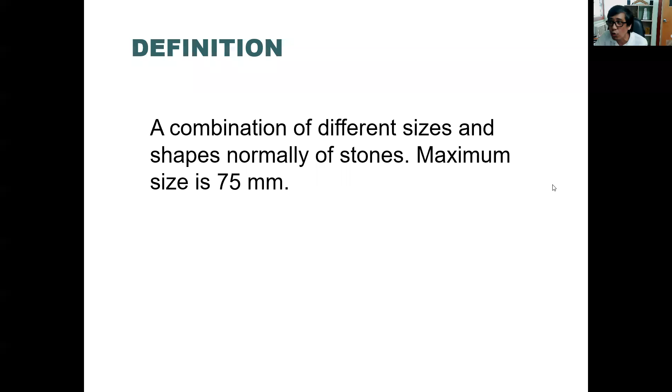Aggregates are a combination of different sizes and shapes, normally of stones, with a maximum size of 75 millimeters. The uses of aggregates include underlying material for foundation and pavement, used under the foundation or before pouring concrete to slabs on field or road.

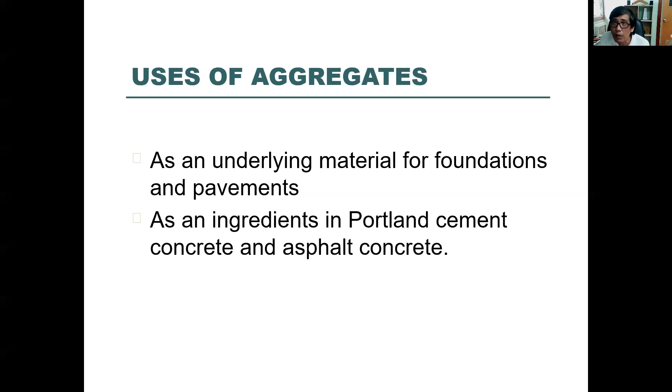Aggregates are also an ingredient in Portland cement, concrete, and asphalt concrete. If you will create concrete mixture, you need to get aggregates. And if you need to create asphalt concrete, you mix aggregates with chemicals and oils to create asphalt concrete pavements. The selection of aggregates shall be hard, durable, and clean, free from adherent coatings and organic matter, and shall not contain appreciable amounts of clay.

You need to wash the aggregates to make sure any organic matter is washed out. Also, the aggregate should not contain harmful impurities like salts, coal, mica, shale, or iron, as these will affect the hardening of the concrete or attack the reinforcement or reinforcing bars. So you need to take out all the impurities.

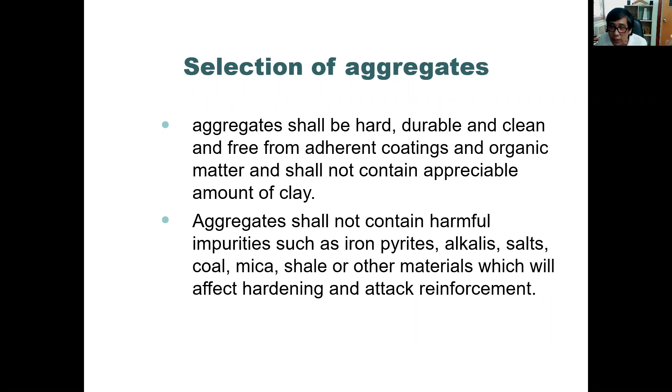As we all know from our previous lecture, the components of rocks, there are several rocks that have impurities on them. So you need to take out all of those impurities.

The classification of aggregates: we have two types, fine aggregates and coarse aggregates. Fine aggregates are aggregates which pass through a sieve of 4.75 millimeter, or an aggregate with a size less than 5 millimeter.

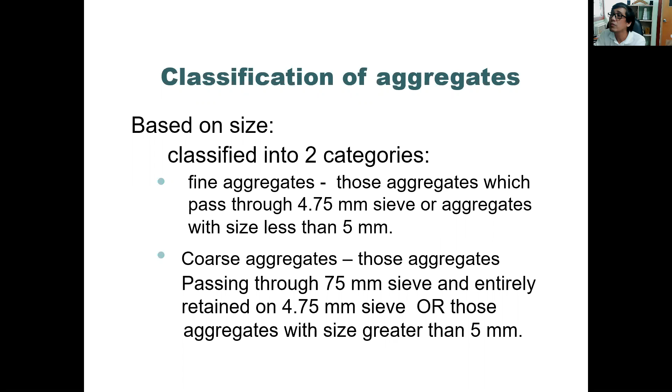The coarse aggregates are those aggregates passing through a sieve of 75 millimeter and entirely retained on a 4.75 millimeter sieve. So the size of the sieve hole for segregation of fine and coarse aggregates is about 4.75. Less than 4.75 is fine, and more than 4.75 up to 75 millimeter is coarse aggregates.

Based on the source or method of manufacture, we have two categories: natural aggregates and manufactured aggregates. The natural aggregates are uncrushed gravel or uncrushed aggregates, from river beds, river sands, or ex-mines.

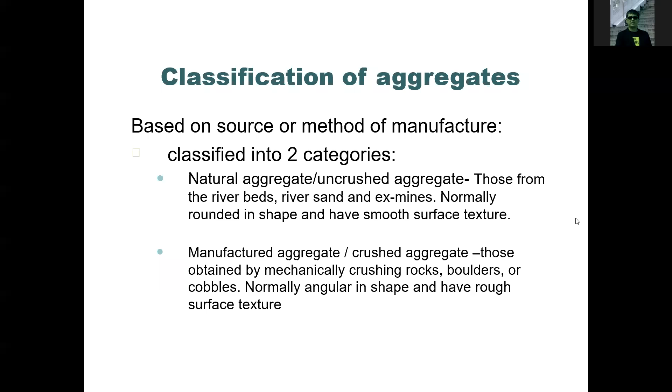Based on density, we have three types: lightweight, normal weight, and heavyweight. The normal weight aggregates are crushed stones, gravel, and ordinary sands, examples of normal weight aggregates. They are commonly used in manufacture of normal weight concrete, asphalt concrete, and roadway sub-base.

The average value of specific gravity for sand and gravel is about 2.6 to 2.65. Bulk density of normal weight aggregate is around 1,520 to 1,680 kilogram per cubic meter. So this is the normal weight aggregates.

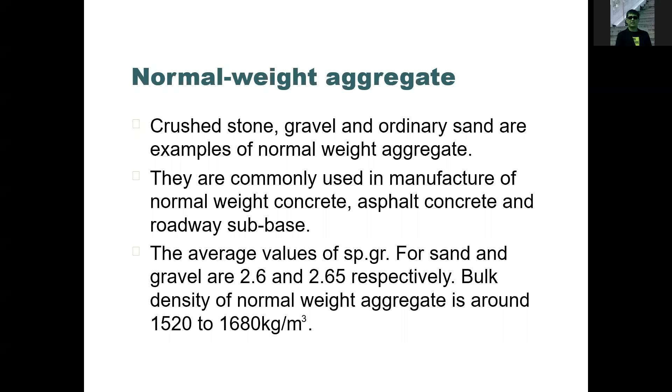Now if we look at lightweight aggregates, these are fine aggregates or any aggregates with a bulk density of 1,120 kilogram per cubic meter, so lighter than the normal weight aggregates. They are commonly used as ingredients in the manufacture of lightweight concrete, for making lightweight masonry blocks and lightweight floors and roof slabs.

There are two types of lightweight aggregates. One is the natural lightweight aggregates that come from palm oil shell, rice husk, and others. And the manufactured, also called synthetic lightweight aggregates.

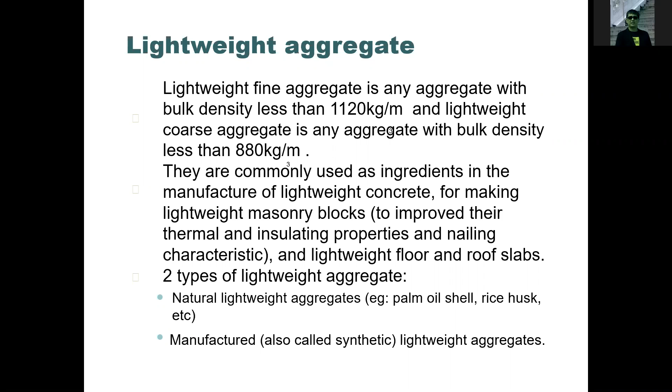The heavyweight aggregates are those aggregates with high density, used primarily in manufacture of heavyweight concrete employed for protection against nuclear radiation and in bomb shelters. The unit weight of the heavyweight aggregate varies from 2,400 kilogram per cubic meter, with a specific gravity range from 4.0 to 4.6, so this is heavier than the normal weight.

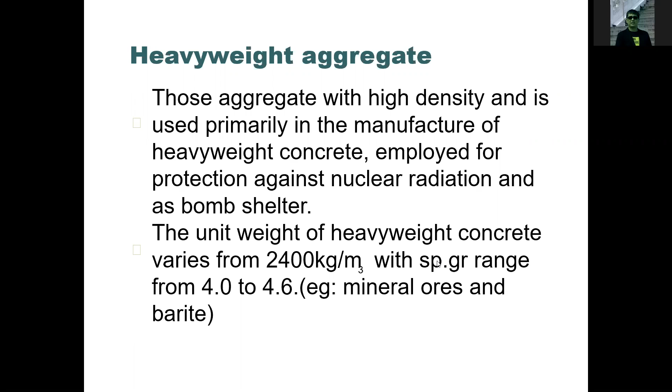The normal weight aggregates are about less than 2,400 kilogram per cubic meter, and the lightweight is about 1,600 kilogram per cubic meter. So now we know lightweight, normal weight, and heavyweight aggregates.

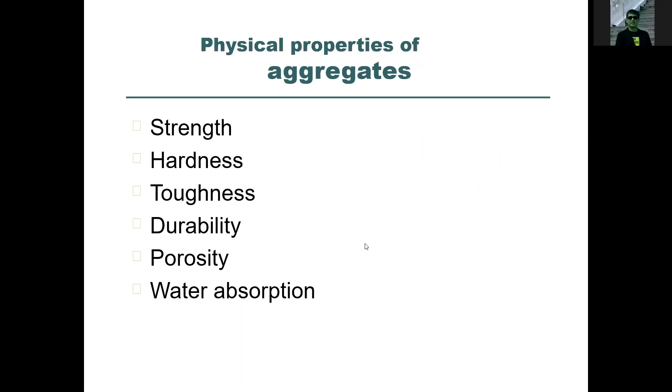The physical properties of aggregates include strength, hardness, toughness, durability, porosity, and water absorption. In terms of strength, in practice majority of normal aggregates are considerably stronger than concrete. If you compare the strength of stone to the strength of concrete, the stone is more durable or has more strength than the average concrete.

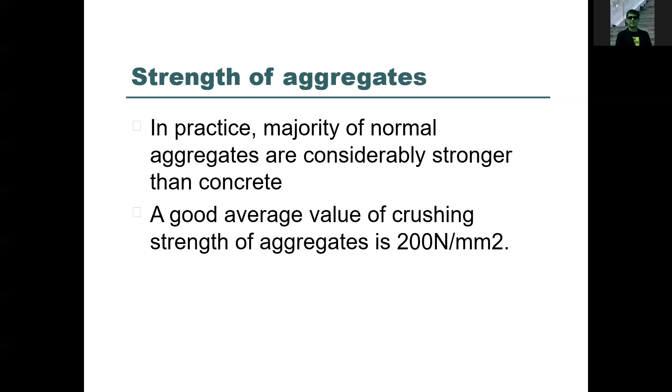Concrete is a mixture of stone, gravel, sand, and water. Stone is harvested from quarries, from rivers, or from mountains. A good average value of crushing strength of an aggregate is 200 Newton per millimeter square. Now, hardness of aggregates.

Aggregates have the ability to withstand wear, load, or applied pressure. In terms of applied pressure, this refers to the hardness of the stone.

If you apply pressure on the stone, the harder the stone, the more it will resist or withstand that pressure. The hardness depends on the type of parent rock. As discussed previously, metamorphic rock has different types of parent rocks, and if the parent rock is harder than other parent rocks, it will create a harder aggregate.

A satisfactory aggregate should have an abrasion value of not more than 30% for aggregate used for wearing surfaces, and 50% for aggregate used for non-wearing surfaces.

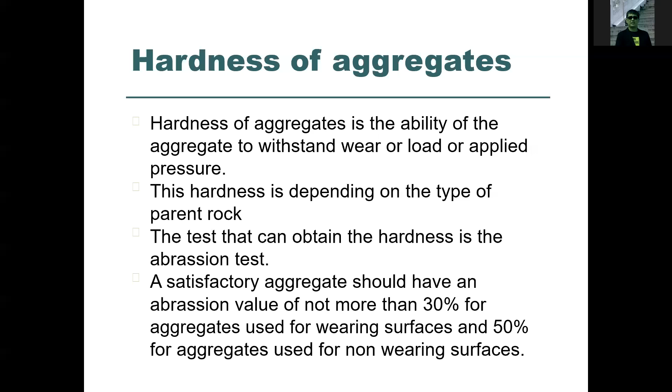Toughness is the resistance of the aggregate to failure by impact, which is very different from hardness. Toughness is determined by impact—if you take a hammer and hit the rock, and it doesn't break easily, that is the toughness of the rock. This can be determined by the aggregate impact test.

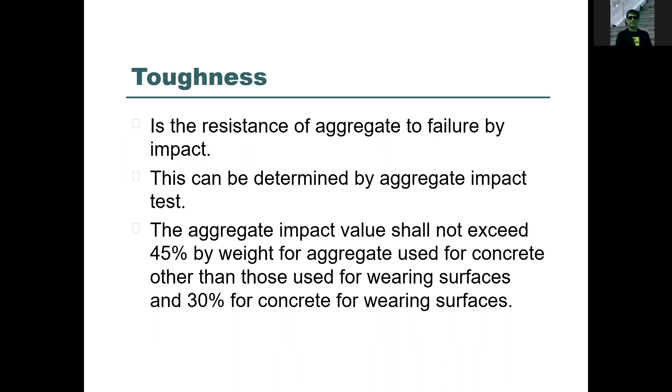The aggregate impact value shall not exceed 45% by weight for aggregate used for concrete other than wearing surfaces, and 30% for concrete used for wearing surfaces.

Durability of aggregates is the ability of the aggregate to withstand external or internal damaging attack. The external damaging attack is the resistance from external weather—heat from outside, outside moisture. That is the measurement of the durability of the rock or aggregate.

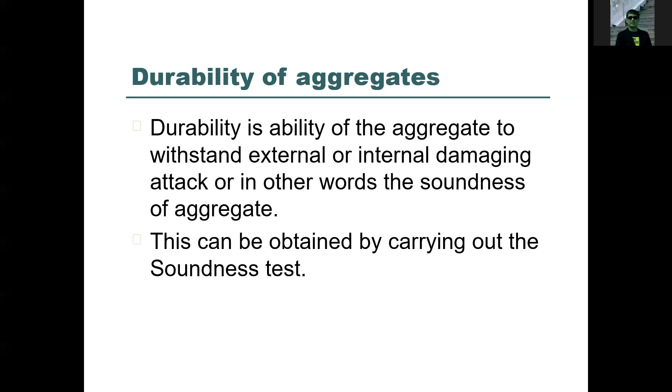This can be obtained by carrying out the soundness test. So you can measure durability by using the soundness test.

Porosity: aggregates normally have pores of various sizes. Aggregates will absorb water when dry, but normally release water in the concrete mix when wet. So the amount of water and its rate of permeation depends on the size and volume of the aggregate.

Since the aggregate comprises 75% of the concrete volume, it is essential to note that the porosity of the aggregate contributes to the overall porosity of the concrete. If the aggregate is porous, the concrete is also porous, so the porosity of the concrete mixture depends on the porosity of the aggregate.

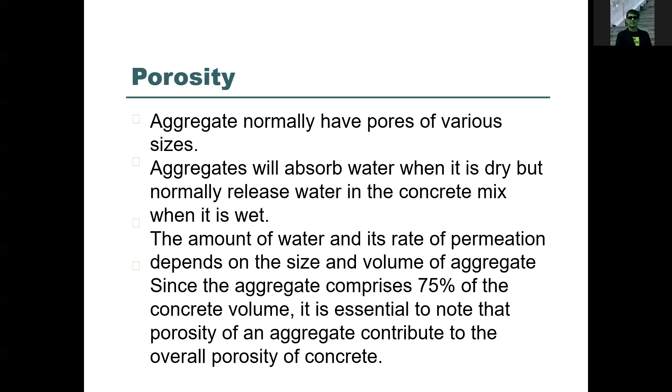In terms of texture and shapes, round shape aggregates are usually natural aggregates—if you get aggregates from the riverbed, they are naturally round. Irregular shape is a combination of different shapes. The angular shape is usually crushed stone—if you crush a large rock into specific sizes, that is called crushed stone, and it is angular in shape.

The flaky shape is where the thickness is less than the length. The elongated shape is where the length is larger than the width and thickness. Flaky and elongated is a combination of these two characteristics. In terms of surface texture, the aggregate may have a smooth texture, coarse or rough texture, or fissures or pores.

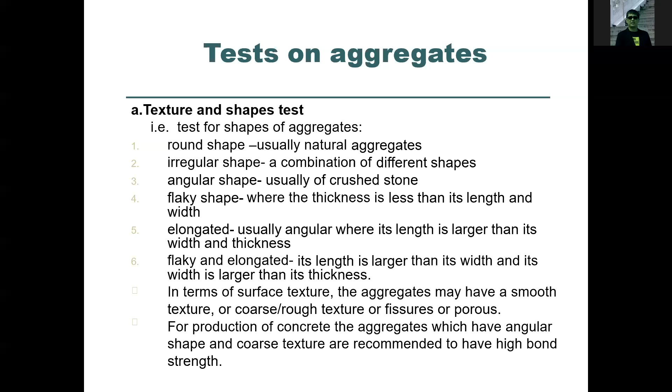For production of concrete, aggregate with an angular shape and coarse texture is recommended for high bond strength. So in creating concrete mixture, it is better to use crushed gravel because of its coarse or angular shape—it will bond easily with the cement and sand, and create a high bond strength.

In testing aggregates, we have different tests available: the aggregate crushing strength test, the Los Angeles abrasion test, the aggregate impact value test, and the 10% fines test.

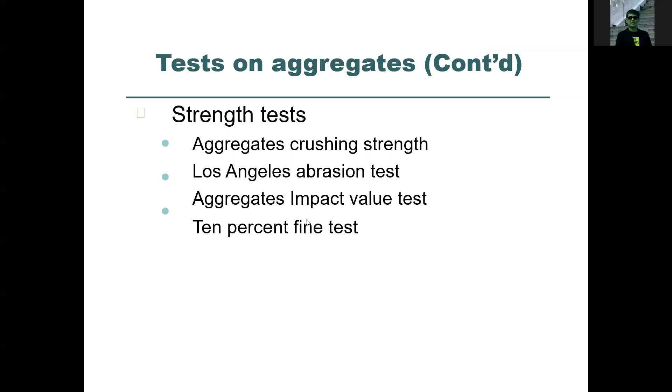The physical properties of aggregates: the specific gravity is usually 2.6 to 2.7, and the water absorption test—aggregates absorb water because of their porosity.

If all the pores are filled with water, the aggregates are said to be saturated and surface dry. If all the water inside the pores is removed by drying, the aggregates are said to have maximum dry weight. So there is a difference in the weight of the aggregate depending on water content—if it has water content inside, it will weigh more than aggregates without water inside.

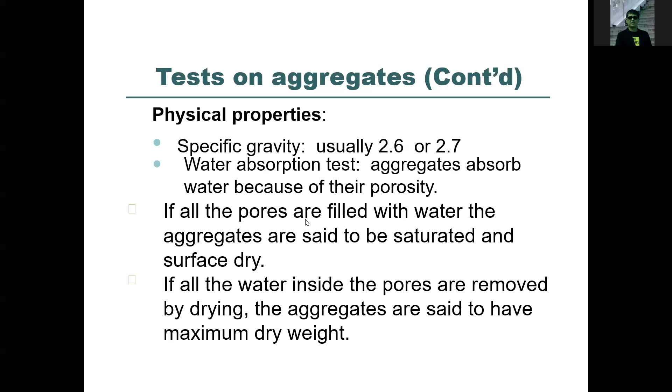The grading of aggregates: coarse and fine aggregates used for making concrete should be well graded. Gradation means the particle size distribution of the aggregates.

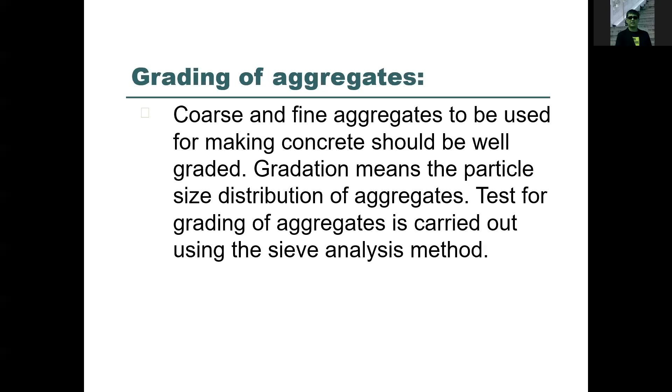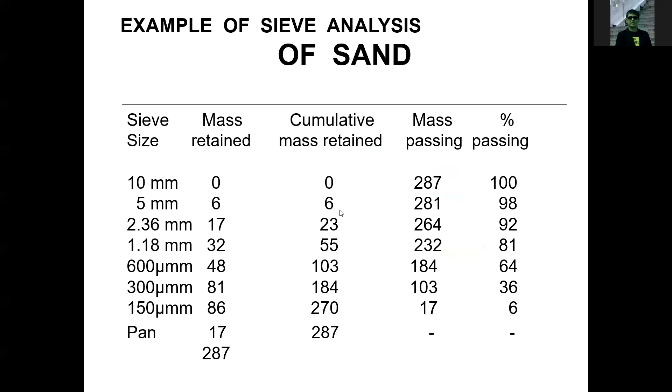These are samples of sieve analysis. Okay, that ends our lecture.